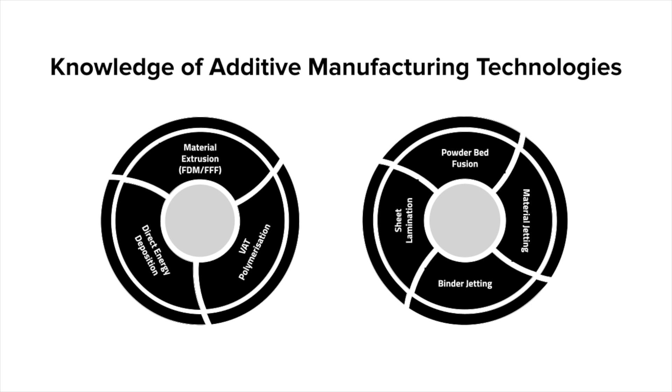So before we even start looking at any of the machines and the technology, one of the things we need to understand is how we get a model ready to be placed onto a 3D printer. And one of the first things that we need is an electronic file design of the actual part that we want to recreate.

So if you look at the picture on the left-hand side, we've got an Apple model that has been divided up into what we call slices. This is done in a specific slicing software. There are a number of different ones on the market, but eventually they all really do the same thing, which is dividing up the 3D part model into subsequent layers, which when placed together will create a complete model.

Now for FDM, the type of layers or the coding that comes out of the machine is G code. What the G code does is move around the printer head in a predetermined path to lay or deposit material in a pattern to complete each layer. Then the build plate will lower down and follow another path to lay material on the previously laid layers. A second type of slicing output are images.

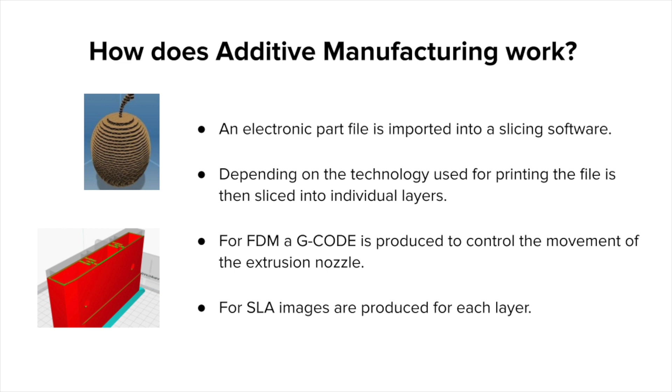Your model gets sliced up into layers, and depending on the technology, the coding or images are produced by the slicer to then be placed onto the 3D printer. Here's just a quick video.

What we've got is fused deposition modeling or fused filament fabrication, FFF, an additive manufacturing process belonging to the material extrusion family. In FDM, an object is built by selectively depositing melted material in a predetermined path, layer by layer. The materials used are thermoplastic polymers that come in filament form. FDM is the most widely used 3D printing technology, representing the largest installed base of 3D printers globally, and is often the first technology people are exposed to.

A designer should keep in mind the capabilities and limitations of the technology when fabricating a part with FDM, as this helps achieve the best results. As I mentioned earlier, FDM is always the technology we would promote for someone new to additive manufacturing.

There are lots of different manufacturing machines out there, and each manufacturer has their own unique machines with unique selling properties and manufacturing properties.

Looking at some of the machines that we sell, we've got the Ultimaker range. We've got 3 models currently: the Ultimaker S5 Pro bundle, the Ultimaker S3, which is slightly smaller, and the Ultimaker 2 Plus Connect. We can obviously split the bundle up into the Ultimaker S5, and it's just the Ultimaker S5 print machine.

What they have really is this is an FDM machine using dual deposition, so you've got 2 nozzles that will deposit either a single build material, a build material with a support material, or actually a dual build material. So you can mix and match different materials for one print.

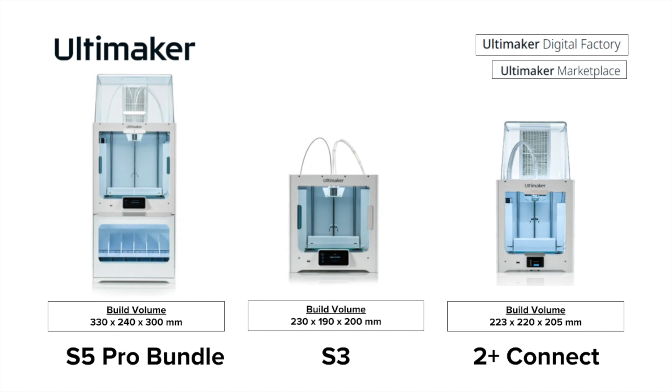The thing with the Ultimaker range as well is they've got a massive, large marketplace with lots of different plugins and materials available that seamlessly merge into the Ultimaker ecosystem. You can also manage your printers remotely. Ultimaker have the Ultimaker Digital Factory, which allows for managing multiple machines, multiple user management, and also managing your print queues and your complete printing ecosystem.

Another manufacturer that we have is Raise 3D. With the 3 models we currently sell, we've got the Pro 2, the Pro 2 Plus, and the E2. As you can see there, these are larger volume print machines. Each comes standard with a hood, a cover, and a UFP carbon filter.

They're highly recommended. Again, very much like the Ultimaker, they have their own material filament providers that have all the settings for the printer. And also you can manage your printers remotely from the cloud, so you can monitor and streamline your operations.

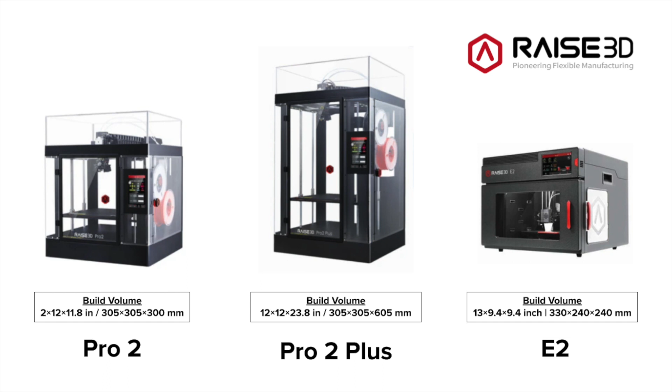We also just recently have the BCN3D range of machines. Now the BCNs come with IDEX, which is independent dual extruder, so this is again a unique selling point for this type of machine. What it does do, again, is have two deposition nozzles, but it allows you to print either a single build using both nozzles.

A single build with support material, or if you want to up your printer speed, being able to not just make it into a one printer, but act as though it's a two printer. What you're able to do is add the same material into both nozzles and print in either duplication mode or mirror mode. This means both nozzles will move either simultaneously in the same direction or opposing directions to create two models at once on your build plate.

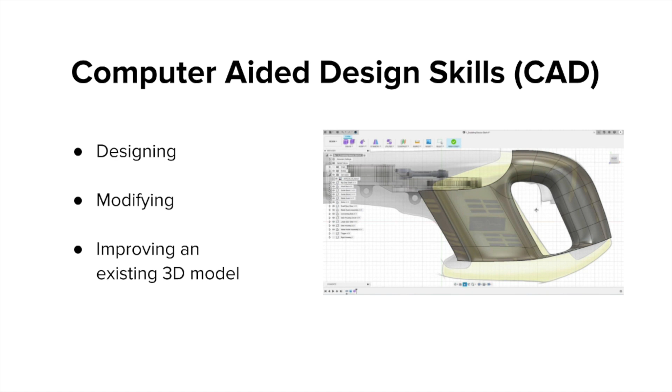Designing, modifying, or improving an existing 3D model - the creativity and knowledge of a skilled CAD designer is not something that you can easily replicate. While CAD design software has become more accessible and user-friendly, anyone using it still needs to have a bit of knowledge of the way that parts go together. They've got to be skilled in things like design thinking, computational modeling, analysis, and engineering. Because of the sheer number of different competencies involved, it can often be the most difficult of the additive manufacturing skill sets for prospective operators to master.

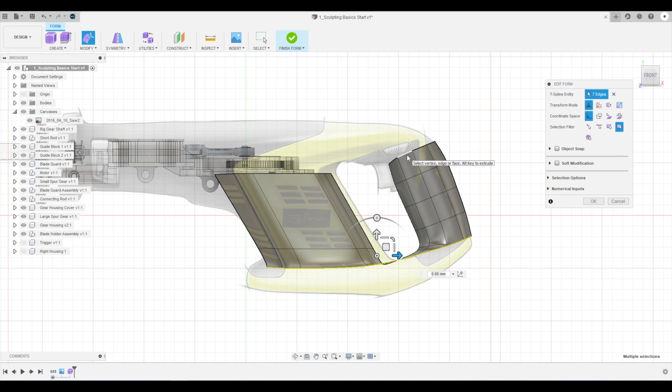So if we move on again, looking at design for additive manufacturing, AM prints from CAD models by adding materials layer by layer. This process is the opposite approach from most traditional forms of manufacturing, which remove or subtract material to form the desired shape.

Often with the desired shape modified for the machining available and potentially a non-optimized part produced. So with your CNC cutting, you'd start from a solid block, you'd then machine what you could with that tool, and potentially it might not be an optimum part, but it will do the job that it's designed for. If you want to optimize the part, you then have to start potentially turning the orientation of it, remachining it in 3 or 4 different setups, which is not adding any value. It is optimizing it, but the initial machined part would have done the job. So why spend all the extra money doing that?

What additive manufacturing does is free designers from this type of mindset. The layer-based additive nature allows for high degrees of customization on complex geometries. This provides you with the flexibility to integrate features into complex parts without the simplification needed for most conventional subtractive production methods. This freedom and flexibility means that designers can think conceptually much differently when working in additive manufacturing, offering more of an opportunity to design from a blank slate or an empty bed plate, if we look at it from an additive manufacturing point of view.

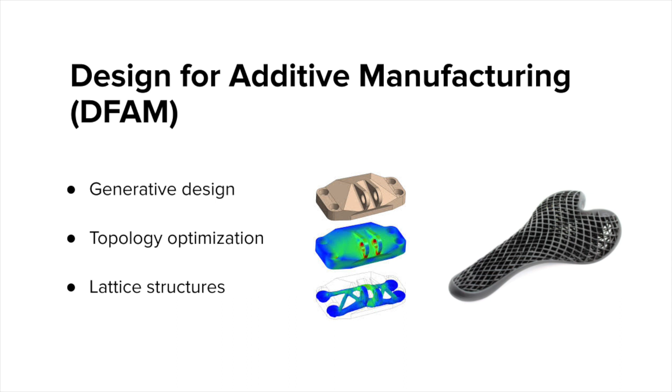However, AM still has its own considerations, whether it is material selection, support or build strategy, or choice of which process to use for a given project. The most important aspect of design for additive manufacturing is to identify and take full advantage of the tools available to get the most benefit from things like generative design, topology optimization, and lattice structures which are now available within these softwares.

Additive manufacturing has matured over the last decades and has become a constant in our product design and development cycles. We have a much wider range of materials and we can produce much stronger and more accurate components in a shorter amount of time. There is a whole material science now behind the choice of the correct material for the process and the end parts. And with the ever-increasing materials catalogue, including standard non-filled materials, filled materials, and engineering advanced materials like glass and carbon filled, and even now metal you can print with - using the correct material for the application can save you time and money.

Things to think about when selecting the right material are the properties - what are the key features and functions of this particular part, what does it need to do? The processing parameters - what temperatures are we going to be working at to be able to produce this part? The performance of the part - are there any structural loads that are going to be applied to it in use? And obviously the common applications for that type of material and the part itself. So that's really just delving into the material science side of things.

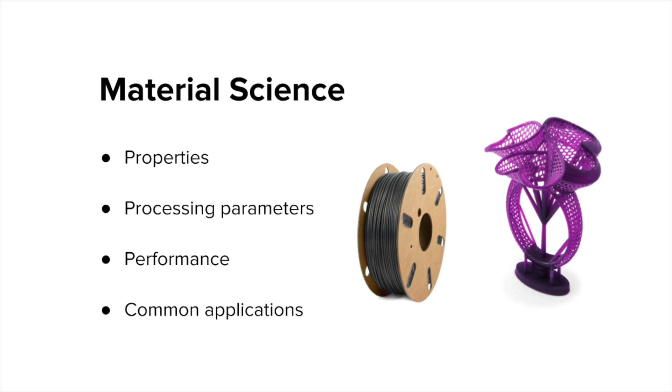But again, one of the bigger skills here is the post-processing of parts. Additive manufacturing is not only about designing and preparing your project for 3D printing - a distinguishing professional feature is the level of post-processing skills needed to make realistic and accurate model representations.

So some of the things you're going to be looking at, potentially depending on the materials you're working with, depending on the expected outcome of the part - is it going to be hidden away so you're not looking at aesthetics, or is it something that needs to be smooth and shiny, looking as though it's been injection molded, that sort of surface finish? We need to look at things like support removal, we may need to do some grinding or sanding, maybe some cutting, filling in some areas, maybe painting, coating, or even polishing.

Finishing is especially important when creating 3D printed production parts because they provide different challenges than conventional machine parts. The layered 3D printing process of some machines may not be as accurate as some traditional production methods. That's why you may still need to employ traditional CNC machines in the 3D finishing process.

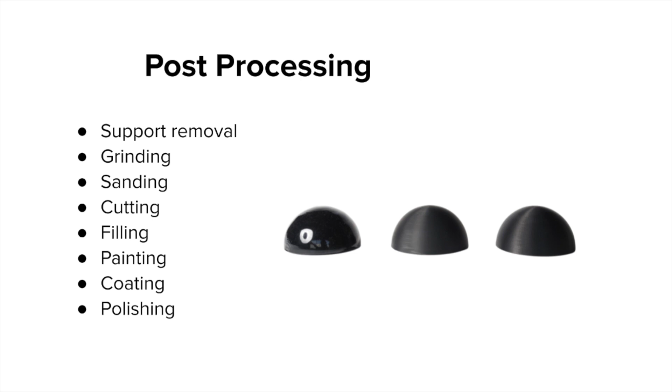Ultimately, the material and the technique chosen for finishing your 3D printed pieces depends on the application requirements. Is it a prototype? Is it a presentation model, or is it a functional part? It's essential to understand and master the various post-processing finishing methods available so that you can meet the desired outcomes of that part design.

One of the big advantages that additive manufacturing gives us is the ability to reverse engineer the part, not only to recreate the part exactly as it was, but to potentially look at how we can make it better. It's all right being able to replicate a part and reproduce it, but it gives us the opportunity to actually rethink and potentially redesign that part.

Now, an attractive feature propelling the adoption for many companies is the prospect of utilizing 3D printing for obsolete or replacement parts inventory. So there's a high degree of reverse engineering that may be required to both directly replicate legacy parts and incorporate any part improvements enabled by additive manufacturing.

Tight tolerances and high resolution 3D laser scanners can capture these sometimes difficult geometries, requiring quality control and testing before production. Not every re-engineered part will be a good candidate for additive manufacturing. That's one thing we need to make clear - additive manufacturing is not going to be able to replace everything straight away.

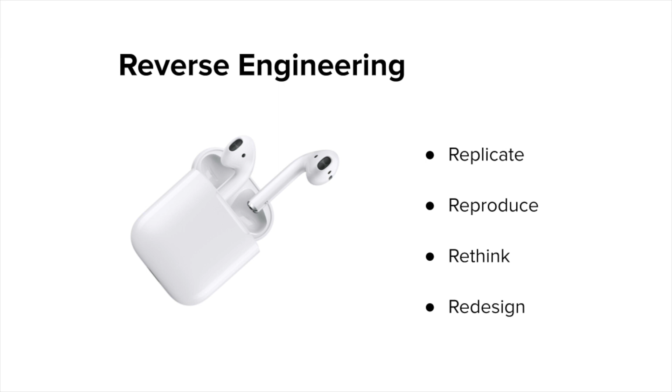And then finally, the final skill we see as required is critical thinking and soft skills. So while there's always a focus on hands-on technical skills, the overall level of critical thinking and problem solving involved in the entire manufacturing process should not be overlooked.

Likewise, the value of interpersonal skills such as communication, collaboration, and leadership abilities are equally important factors for your additive manufacturing workforce of today and tomorrow. Your workers are the best advocates for additive manufacturing, but they need to be able to articulate its value to senior management to encourage its broader use and adoption in creative ways.

My personal view is that additive manufacturing is poised to have a dramatic impact on manufacturing, but it's still in a relatively early stage and has yet to reach its full potential or complete industrial adoption. One of the significant hurdles it's facing is having a qualified workforce to run it all, which is why this level of expertise is in high demand.

So whether you're an additive manufacturing professional seeking advanced opportunities or a business leader seeking new talent to help you take advantage of the technical advancements additive manufacturing offers, you need to cultivate these skills for your workforce of the future. It's a really key skill that we need to look at. So that's really the 7 skills that we see companies need to adopt to be successful in additive manufacturing.

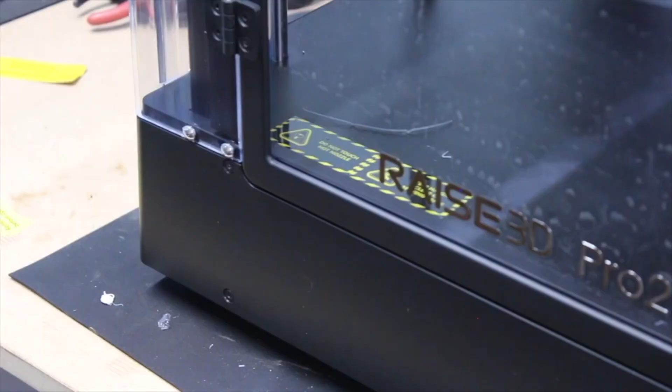Okay, so let's start with JG Plastics. First of all, we're going to meet Graham here at JG Plastics. He's based up in Bury, Manchester area, so not too far from us here at 3DGBIRE.

Now Graham is an experienced CAD designer. He's had plenty of experience over the years designing different parts. However, he was getting them fabricated, paying to have them outsourced, which was costing him quite a significant amount of money, and it was taking away from his profit when he came to sell the end-use parts.

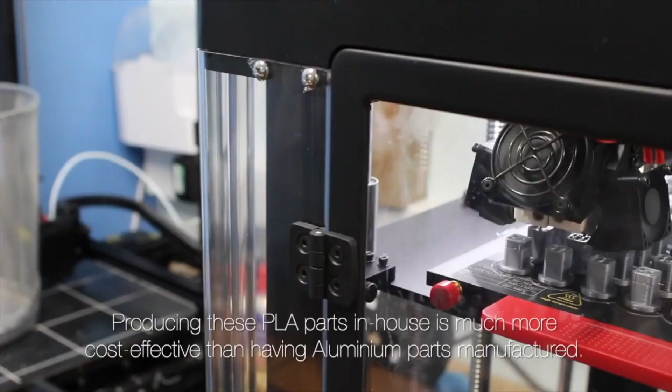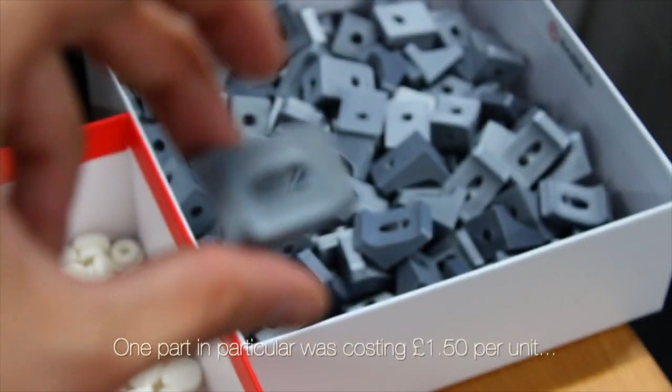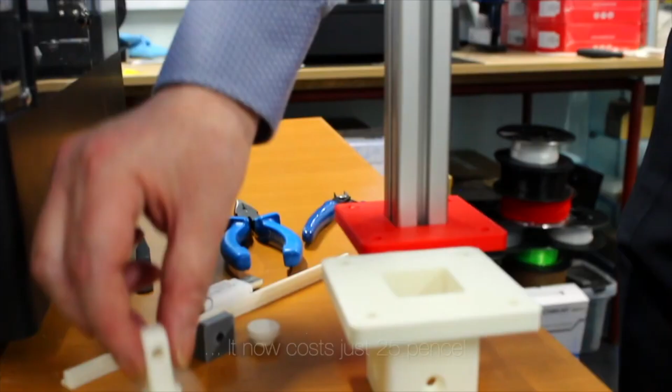In this particular case, we managed to dig into a couple of parts that Graham was previously having machined as metal parts, and he managed to CAD those designs up and start printing them as plastic PLA parts on his Raise machine. Typically Graham was producing these parts at £1.50 per unit, which is obviously quite an expensive cost price. He managed to reduce that down to just 25 pence per unit, saving £1.25.

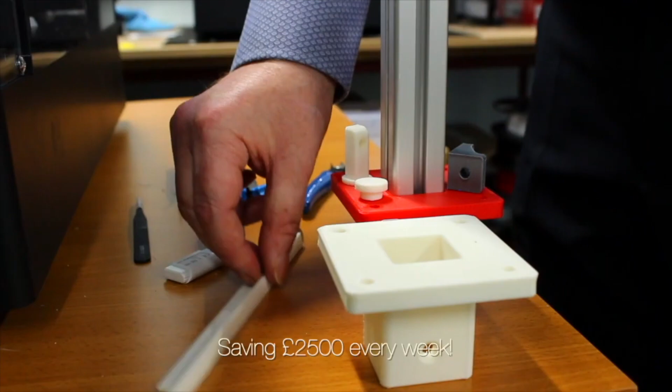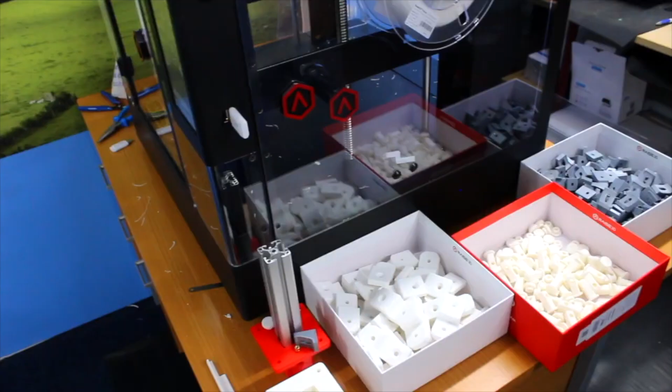Now the real cost saving came in how many of these Graham produces. He produces 20,000 parts every 10 weeks, which works out to about £2,500 a week. Obviously the ROI on that investment, a Raise machine would probably be more than covered in just 2 weeks. So a really fantastic example of how someone can quickly recover that ROI on a 3D printer, which may seem quite a significant initial cost. However, in this case, Graham's recovered that quickly.

He also discusses the time-saving benefits, how the labour cost of production is significantly reduced. He simply has to stop and start his machine at the end of each day and the start of each day. So yeah, a real good example of how 3D printing can be applied to a traditional manufacturing business. And Graham's a very happy customer of ours and a really good story.

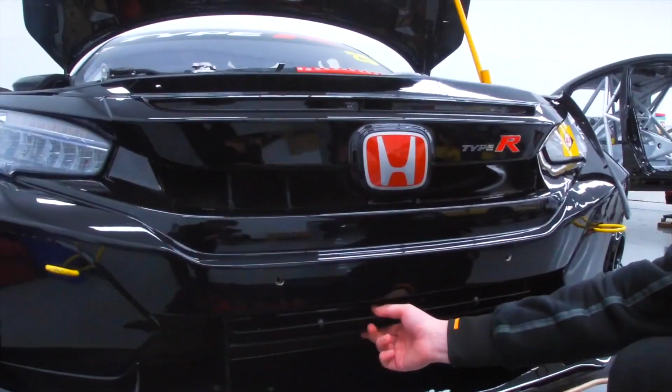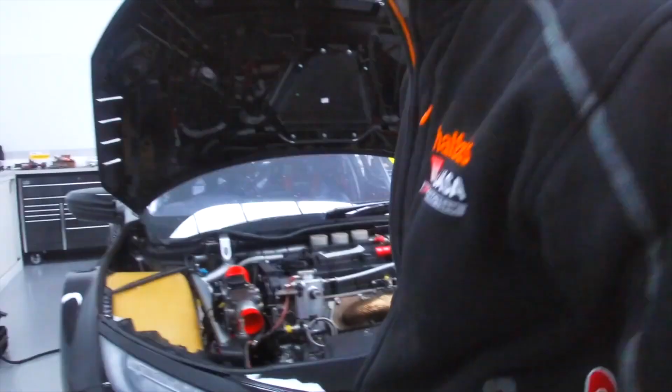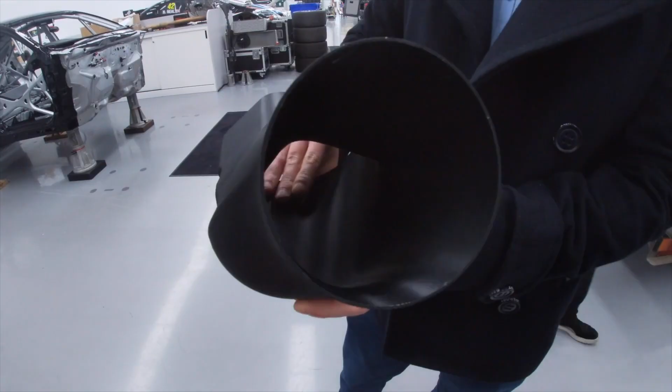So anyway, let's move on now to our next case study, which is Team Dynamics. Team Dynamics are a British touring car championship team based in Birmingham. They're responsible for producing a number of high-end components for their car and various other cars within the championship. They've developed air intakes, bonnet louvers, fixtures and fittings within the car that have to withstand high temperatures and race conditions.

This usually takes a series of prototypes, and in the past there's been a very expensive process to lay up prepreg composites and figure out how these parts are going to work. Testing and trialling these parts could take months and months, receiving back a prototype, then readjusting the design and coming back again to retest.

3D printing has allowed them to change this process completely. They can now redesign parts overnight, print them off, and they can be ready to test again the next day. This has allowed them to develop a USP over the other race teams in that they can speed up their manufacturing and design process for the car, and also the production process.

This has allowed them to sell on parts to other race teams and develop a whole new side to the business where they can generate revenue using the printer, selling on parts. And that's the big thing to take away from this presentation today: with the right knowledge and the right skills, anyone can use 3D printing to develop a USP for their business and solve problems that previously might have been incredibly difficult.

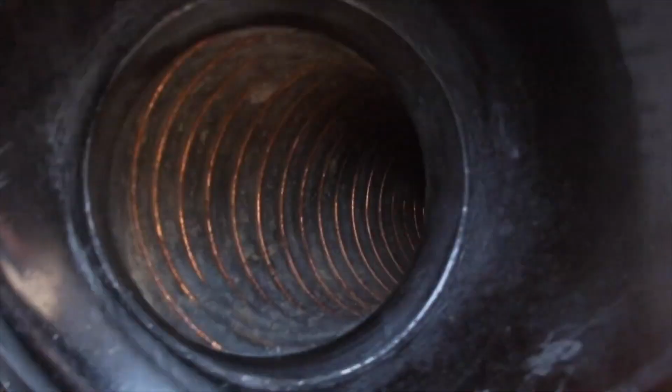There's no one right solution for everybody. Everyone's problem is going to be different and everyone's solution is going to be different. But here at 3DGBIRE, what we want to do is guide you through the process. We want to help you understand the skills you're going to need to help get the most out of additive manufacturing for your business. And we hope that you've learned a lot today. There's still a long way to go on your journey, and I'm sure you feel like you're just getting started.